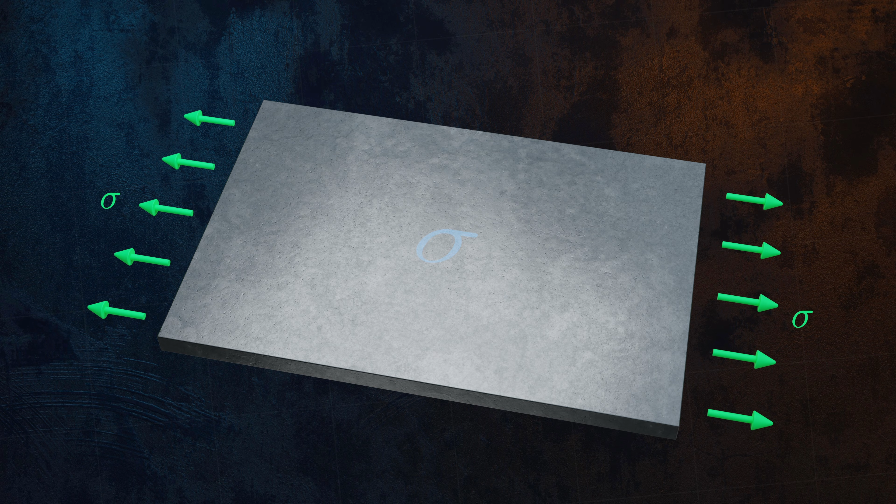If you take a plate and pull on it at both ends, a uniform tensile stress will develop within the material in response to the applied load. This stress is spread evenly across the material. Drill a hole in the plate, and this uniform stress field is suddenly disrupted. Stress flows through a material a bit like a fluid, and the hole forces that flow to detour around it.

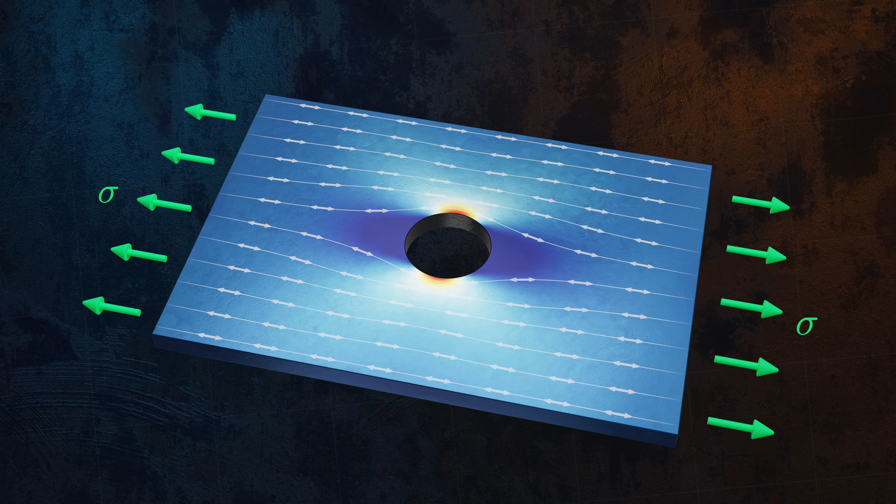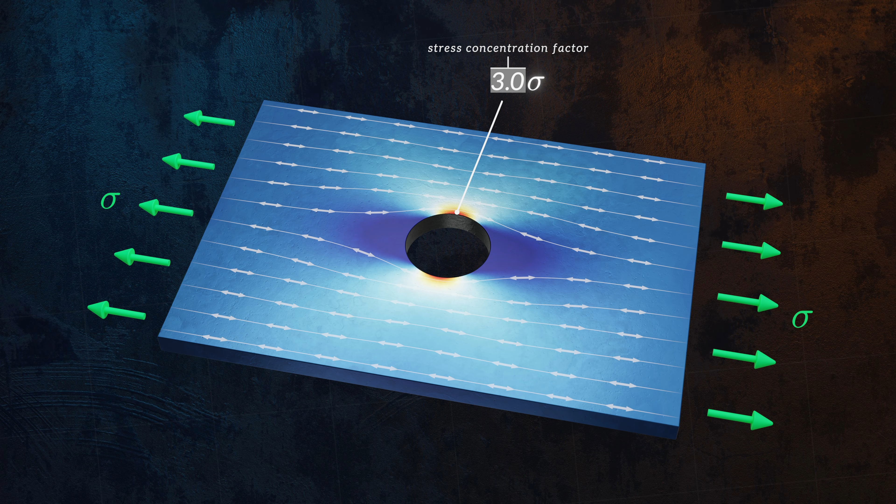The flow lines crowd together at the edge of the hole, which increases the force per unit area in that region. The maximum stress in the plate at the edge of the hole reaches 3 times the applied stress. The hole creates a stress concentration factor of 3. If instead of a circular hole you have an elliptical one, the stress concentration increases even more. The more elongated the ellipse, the more tightly those flow lines are forced together, and the higher the local stress.

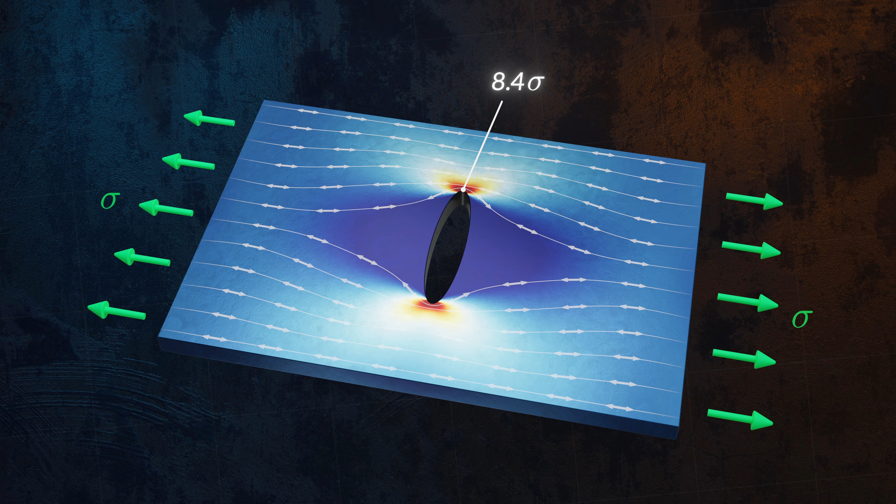This elliptical hole is essentially a crack, a sharp discontinuity where 2 surfaces have separated, leaving a region of the material unable to transmit any load, and forcing the load path around the crack tips instead. If the crack is sharp enough, the stress at its tip can reach high enough levels to permanently rearrange the bonds between atoms, or to break them altogether, which causes the crack to propagate through the material.

And this is what makes cracks so dangerous. They create a large stress concentration that can cause a material to fail at an applied stress well below its yield or tensile strength, the properties we normally use to design structures.

In theory, the local stress becomes infinite as the radius at the crack tip approaches 0. But in practice, when the peak stress reaches the material's yield strength, the material immediately ahead of the crack tip begins to deform permanently, redistributing the load and creating a region of plasticity called the plastic zone. This makes the stress state at the tip of a crack extremely complex.

But luckily for engineers, if plastic deformation only occurs in a very small zone at the crack tip, the severity of the crack depends on just 2 things, the applied stress and the crack size. These can be combined into a parameter called the stress intensity factor, a single value that describes how severe the stress state is at the crack tip.

For a crack in the middle of a plate, like this one, the crack size a is the distance from the center to the tip. This is half the overall length of the crack, so the total crack length is 2a. The stress intensity factor has quite unusual units, megapascal square root meters. That's because it's not an intuitive physical quantity.

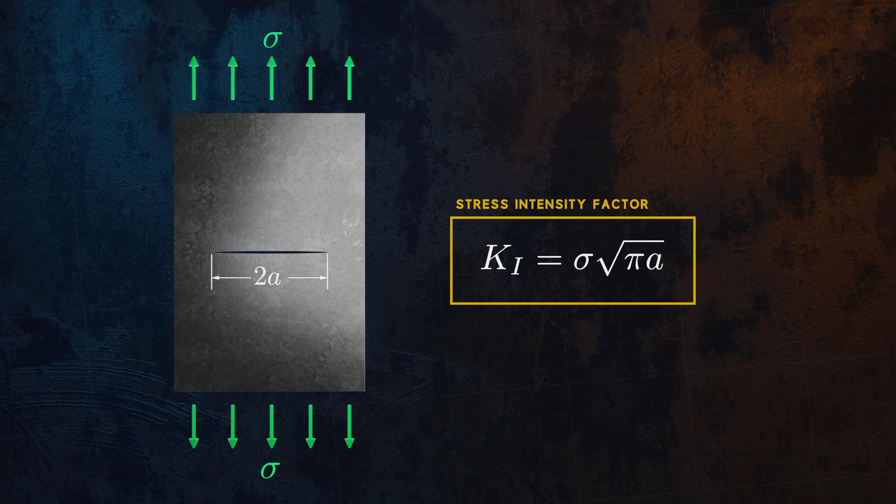It's best to think of it as an engineering parameter that tells us how severe the crack tip conditions are. Larger loads or longer cracks both increase the stress intensity factor, which means more severe conditions at the crack tip, and a crack that's more likely to propagate through the material.

This equation is valid for a through-thickness crack in an infinite plate, far from any edges, but real structures have finite dimensions, and cracks can take many different forms. A crack could have started at a hole, or be located on an edge, for example. These configurations are captured by a geometry factor Y, which scales the stress intensity factor up or down accordingly.

For an edge crack in a large plate, Y is around 1.12. This crack can open more easily, which makes it more severe than an equivalent crack in the interior of the plate. For an edge crack, a is the full length of the crack, not the half length.

The stress intensity factor is called KI because it corresponds to the first of three fracture modes, ways in which a crack can be loaded. This mode, corresponding to opening of the crack, is the one engineers encounter by far the most often in real structures. The sliding and tearing modes use similar equations, but with shear stress instead of normal stress.

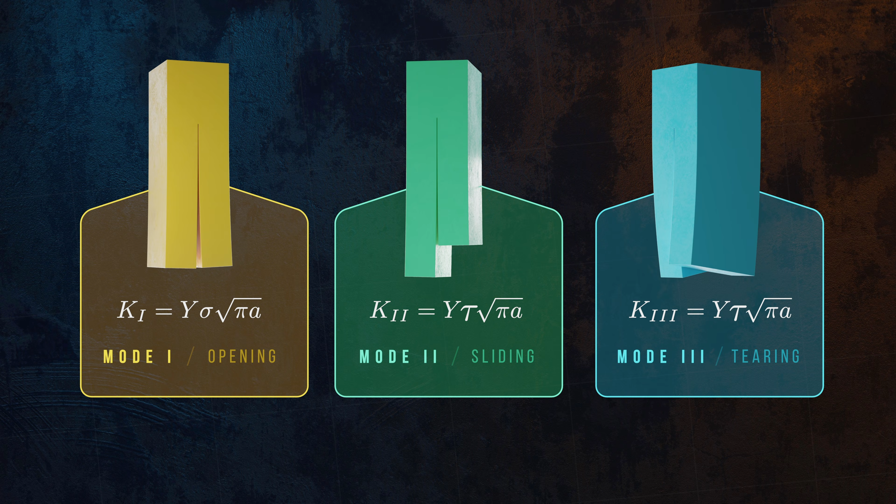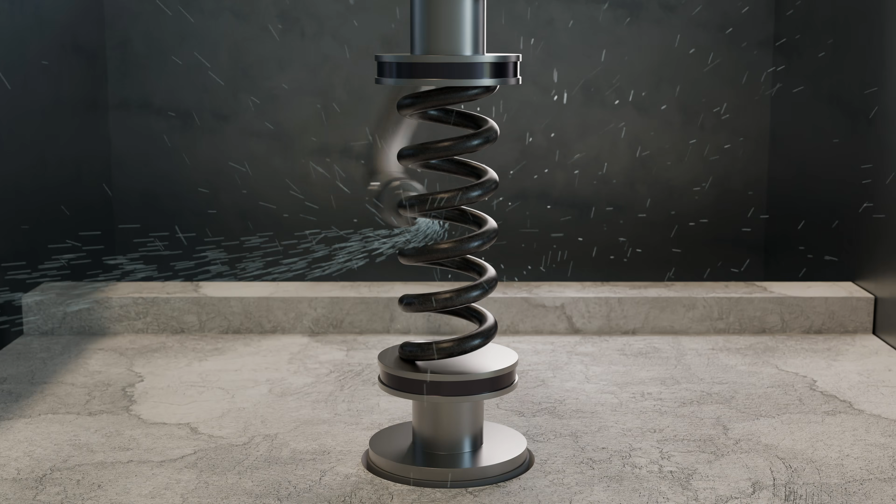Because mode I is driven by crack opening, it's only activated by tensile loads. Compressive loads are actually beneficial when a crack is present, because they act to close the crack faces together, preventing it from propagating. This is why compressive stresses are sometimes deliberately introduced into component surfaces. Shot peening, for example, blasts a component with small particles, plastically deforming a thin surface layer and introducing compressive residual stresses, which make the material more resistant to the propagation of surface cracks.

The stress intensity factor is really useful because it gives us a single calculated value we can use to predict failure in real structures by comparing it against a material property. That material property, called fracture toughness, is the critical value of K at which cracks will begin to propagate within the material. It represents the material's resistance to crack propagation and is obtained experimentally using a standardized test.

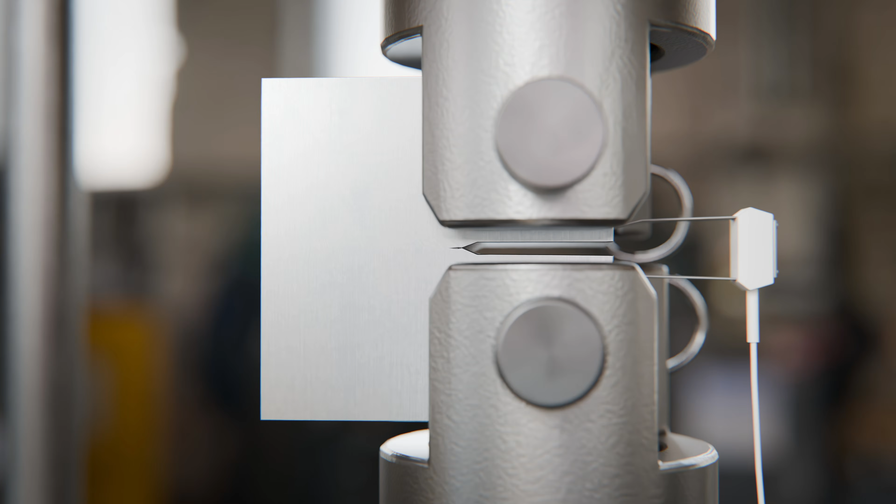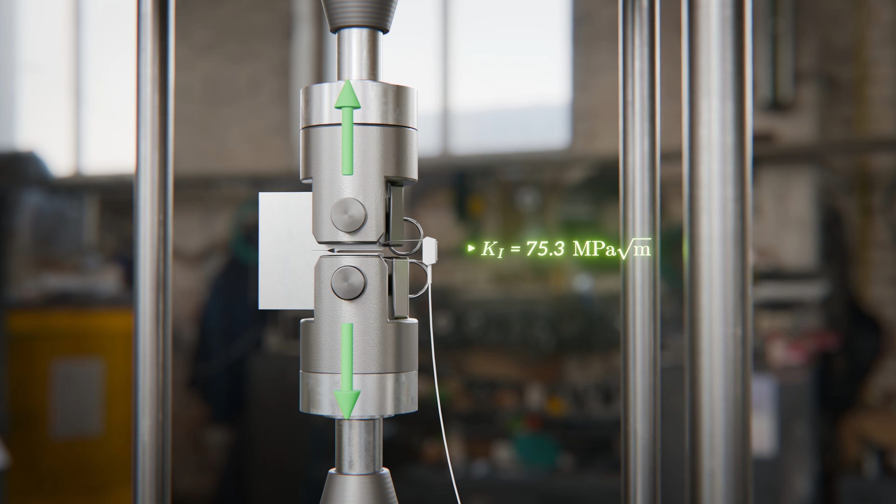The test involves machining a notch in a test specimen and applying cyclic loading to grow a fatigue crack in the notch to a specific length. Once the crack has reached the required size, the specimen is loaded to open the crack, while monitoring the applied force and specimen response. The value of K at which the crack begins to propagate unstably is recorded as the fracture toughness.

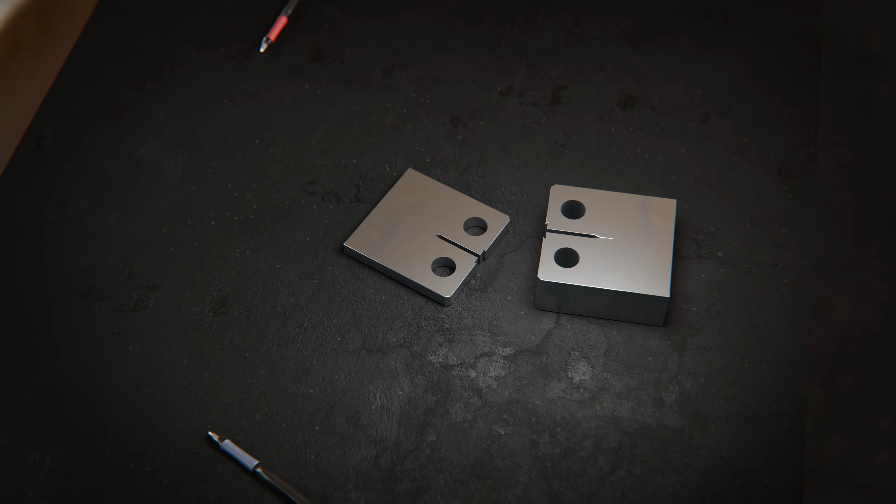The measured fracture toughness depends on the thickness of the material. Thin test pieces don't allow tensile stress to build up through the thickness of the specimen, a condition called plane stress. So they behave quite differently to thicker test pieces, which are in plane strain conditions, where the surrounding material constrains the crack tip and a through-thickness tensile stress develops.

The added constraint suppresses plastic deformation at the crack tip, so the material behaves in a more brittle way and shows a lower fracture toughness. For this reason, the standardized test specifies a minimum specimen thickness, ensuring it measures the lowest, most conservative value, corresponding to plane strain conditions.

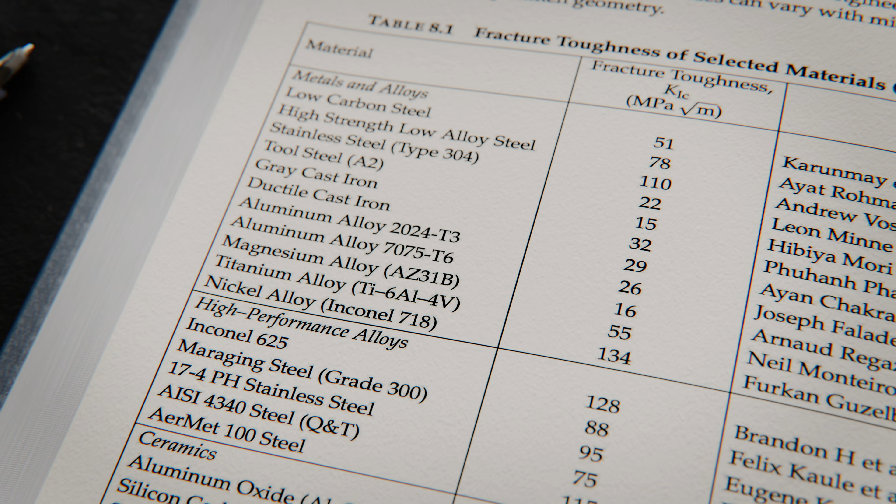Because these tests are highly standardized, the resulting fracture toughness values can be published as reference data and used by engineers designing real structures, although additional testing is often performed for critical applications, or when a material is being used outside of previously validated conditions. Having accurate fracture toughness data is crucial when assessing cracks in real structures.

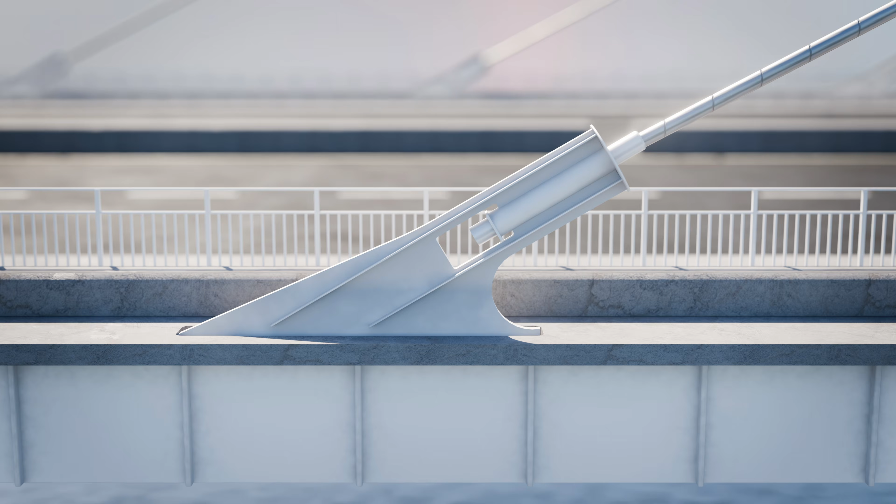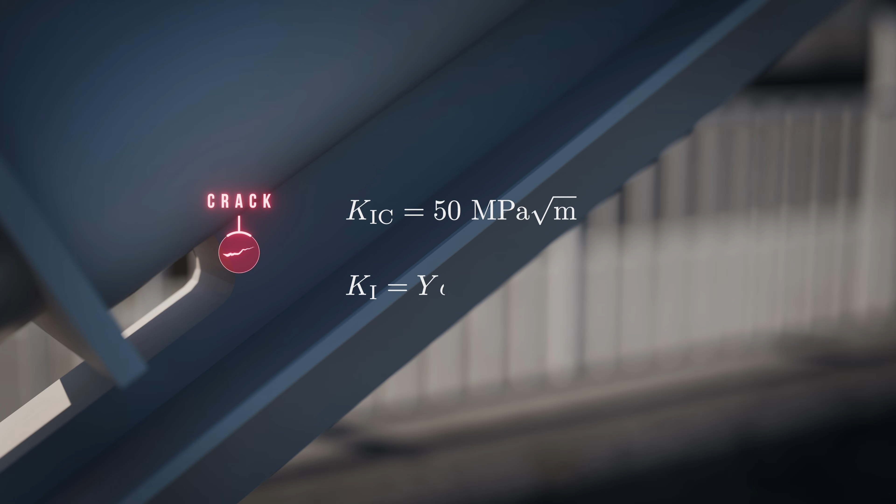Imagine you're the engineer responsible for the structural integrity of a bridge, and during a routine inspection, you discover a crack in one of the stay cable anchorages. You know the fracture toughness of the steel from lab testing performed during material qualification. Using the stress intensity factor equation, you can calculate the critical stress at which the crack would propagate. For a crack length of 10 mm and a geometry factor of 1.12, the critical stress is 252 megapascals.

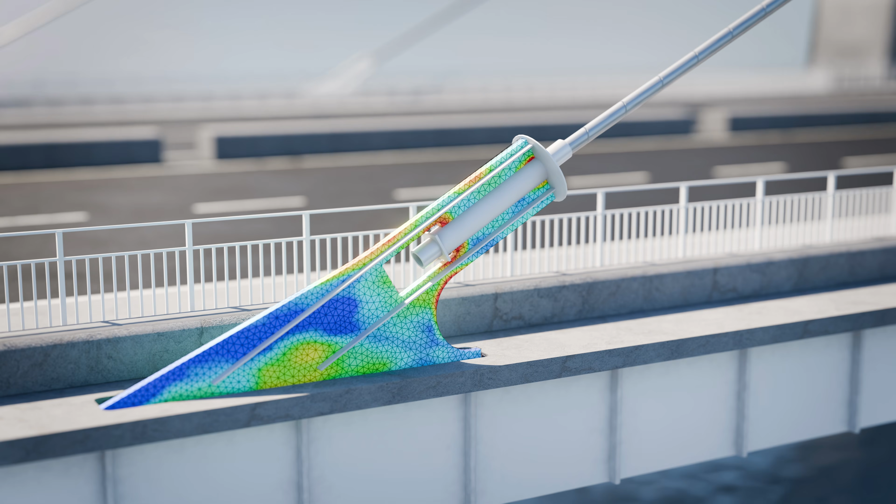Combined with a structural analysis of the bridge, this lets you determine how critical the crack is, how much safety margin remains, and whether the anchorage needs to be monitored, repaired, or replaced. This approach, calculating the stress intensity factor and comparing it with the material fracture toughness, forms the basis of a method called linear elastic fracture mechanics.

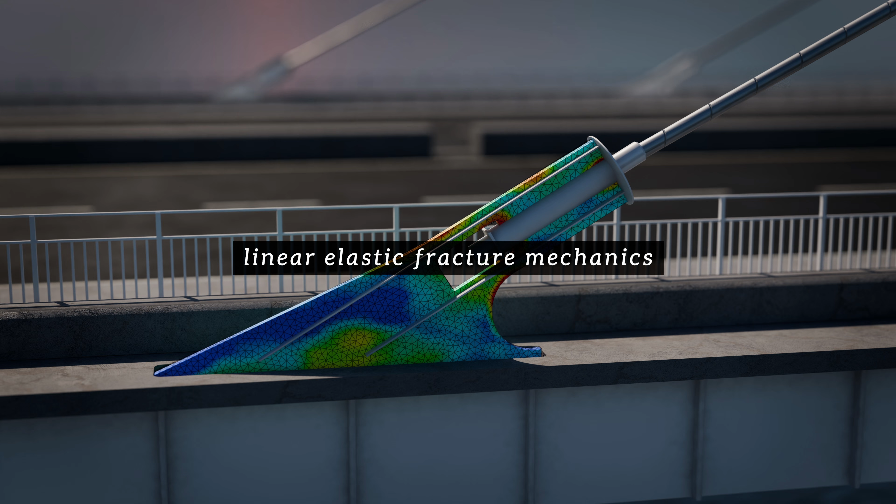We mentioned earlier that the stress intensity factor approach is only valid if the plastic zone at the crack tip is small relative to the size of the crack. This is only really the case for high-strength or inherently brittle materials like titanium and aluminum alloys, high-strength steels, or glass. More ductile or lower-strength materials like lower-strength steels or some plastics deform plastically more easily, resulting in a larger plastic zone at the crack tip, which causes the assumptions of linear elastic fracture mechanics to break down. In these cases, a more complex elastic-plastic fracture mechanics approach is used.

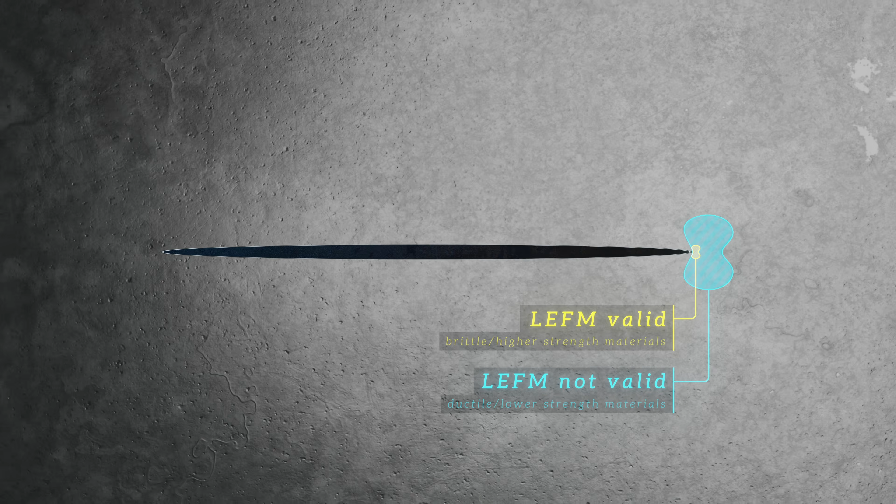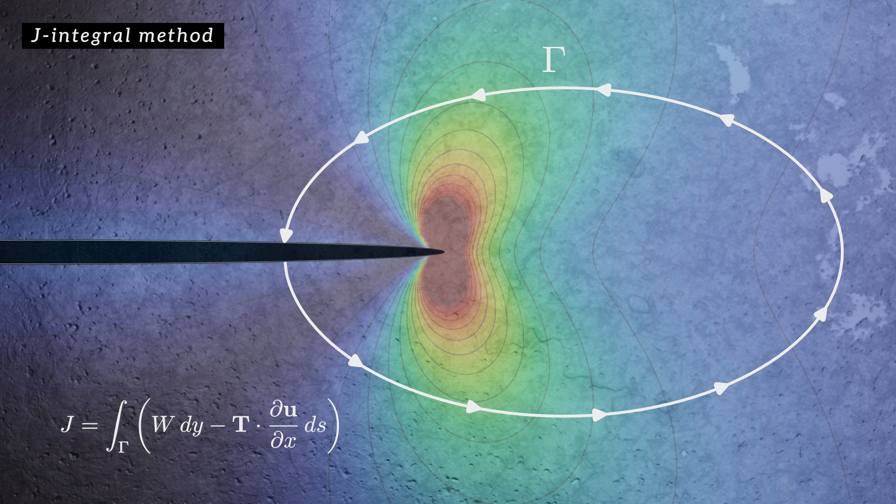One such approach, the J-integral method, involves calculating an integral along a contour path encircling the crack tip to determine how much energy is available to drive growth of the crack. Another approach, the crack tip opening displacement method, involves measuring how far apart the two faces of the crack move at the crack tip when a load is applied.

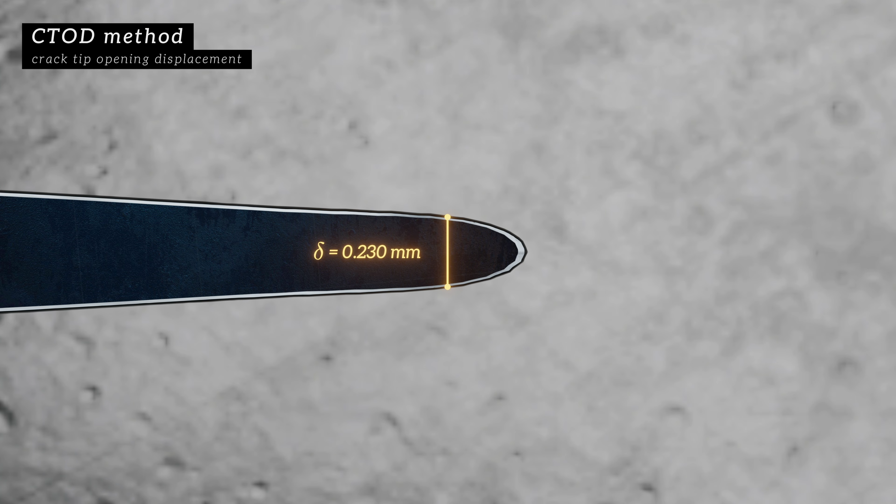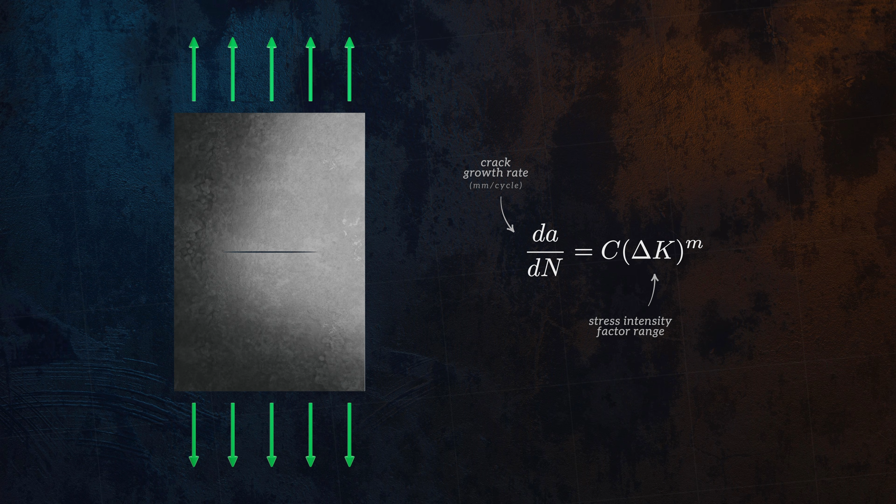We've seen that linear elastic fracture mechanics compares the stress intensity factor with fracture toughness to tell us whether a crack is stable for a given applied load. But if the applied load varies over time, even a small, stable crack can grow incrementally, eventually reaching a critical size where it becomes unstable and suddenly propagates to failure. Paris's law is the key equation used to predict the fatigue growth of cracks. It tells us that the crack growth rate, the amount the crack advances per cycle, is governed by the range in stress intensity factor experienced during each cycle. C and m are material parameters determined experimentally.

Consider a crack with a measured half-length a of 10 mm. When loaded with a cyclic stress that fluctuates between 20 and 200 megapascals, it sees a stress intensity factor range of around 32 megapascal root meters. Assuming material parameters that are typical for a high-strength steel, the crack will grow by around 0.2 mm every 1,000 cycles.

The growth rate accelerates as the crack lengthens, though. When it reaches 15 mm, for example, the crack will have a larger stress intensity factor range, and so an increased growth rate. To calculate the total fatigue life, Paris's law needs to be integrated over the full range of crack sizes, all the way up to the critical size.

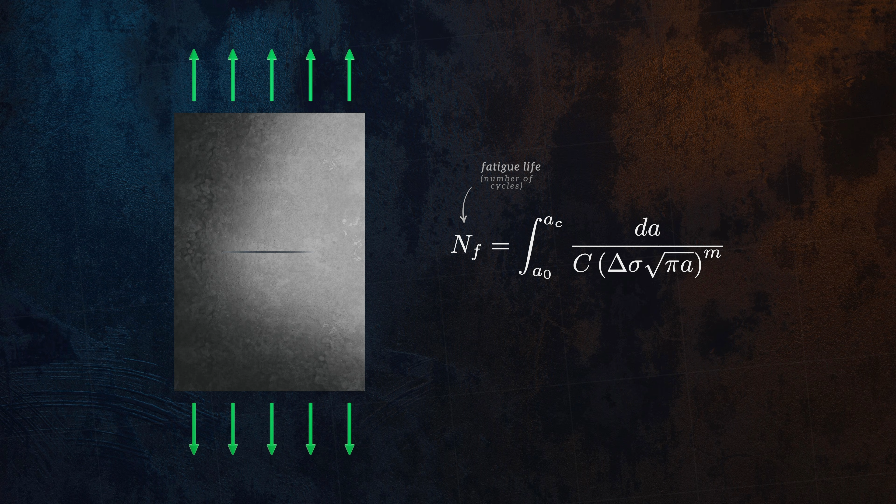On a log-log graph of growth rate against stress intensity factor range, Paris's law appears as a straight line. Because delta K is raised to the power m, small increases in delta K produce disproportionately large increases in crack growth rate. For m equal to 3, doubling delta K increases the crack growth rate by a factor of 8. For very low delta K values, outside the range of applicability of Paris's law, no meaningful crack growth occurs, regardless of the number of cycles. And for very high delta K ranges, as the peak stress intensity factor approaches the material's fracture toughness, crack growth accelerates massively, beyond what Paris's law predicts, and fracture becomes imminent.

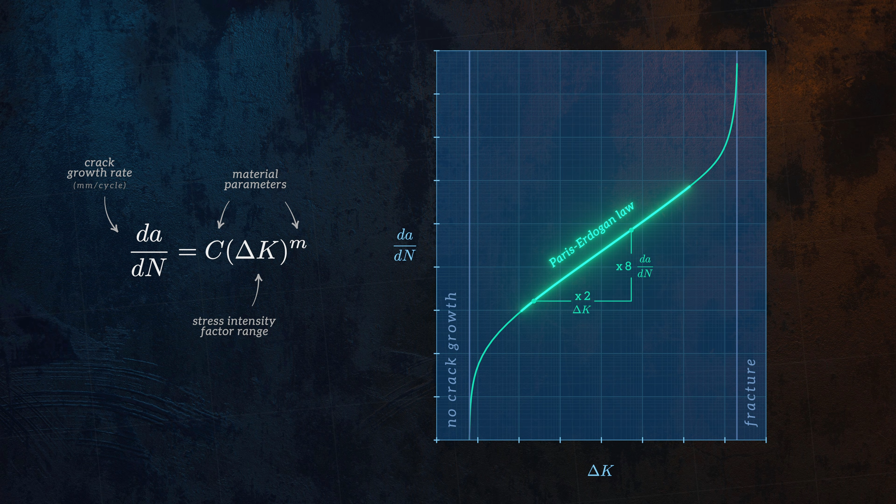No real engineering structure is perfect. Welds contain imperfections. Machining leaves surface damage. And cyclic loading initiates fatigue cracks at microscopic defects that no manufacturing process can fully eliminate. In practice, the presence of cracks is inevitable. Fracture mechanics is so powerful because it gives us the tools to assess how dangerous these cracks actually are. And in doing so, it unlocks a whole new philosophy for assessing structural integrity, the damage tolerance approach. Instead of assuming a perfect, defect-free structure, the damage tolerance approach accepts that cracks will exist and focuses on making sure they can be detected, monitored, and if necessary, repaired before they reach a critical size.

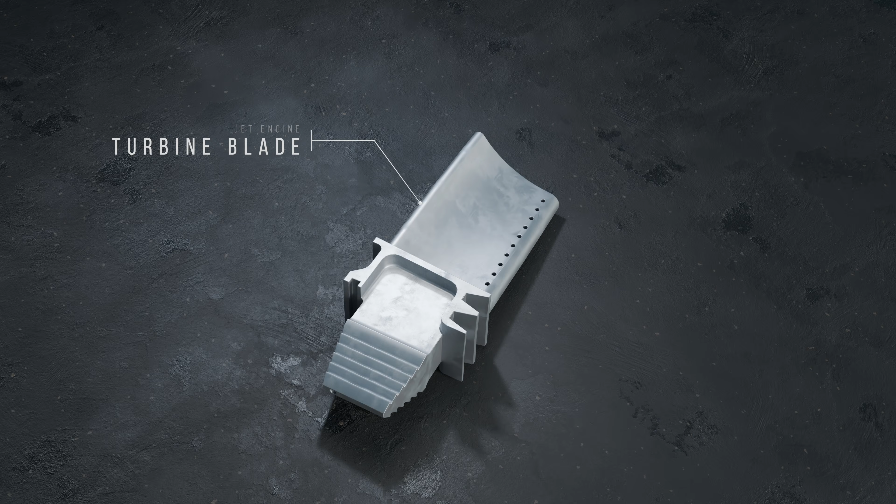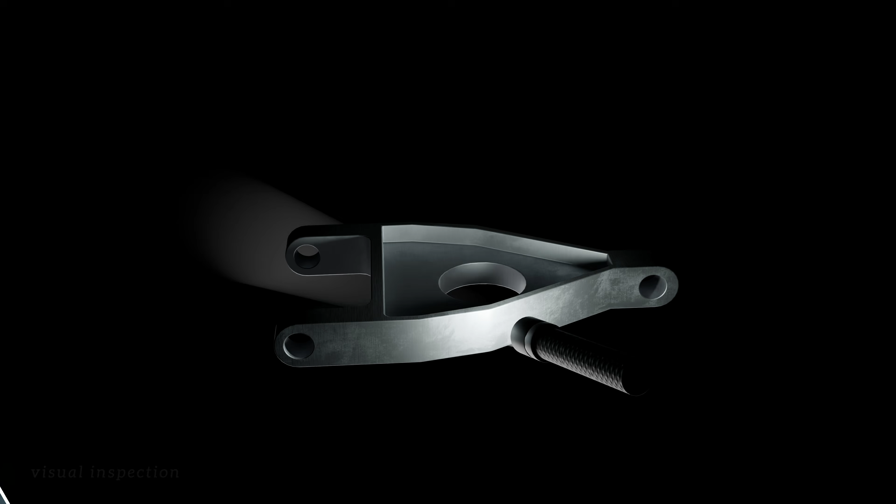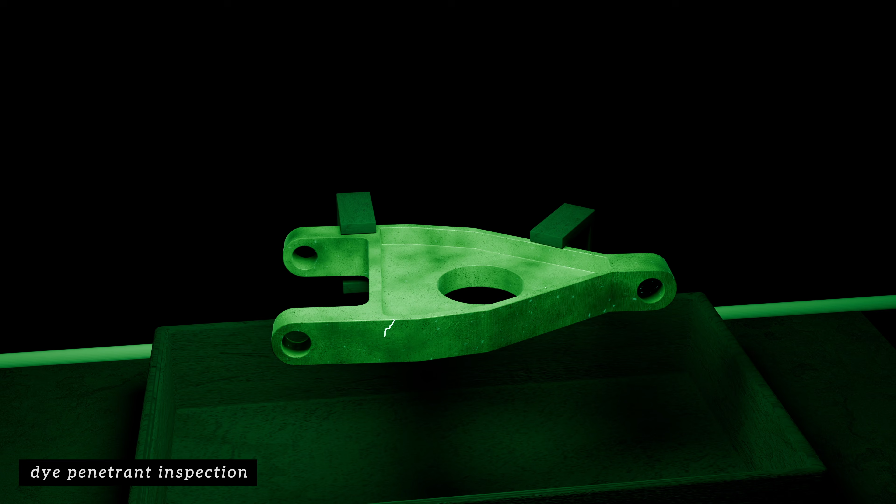This approach is widely used in aerospace, where it emerged in the 1970s. Aircraft components like jet engine turbine blades or landing gear parts are inspected at regular intervals to identify and size cracks. This is done using non-destructive testing techniques like visual inspection, ultrasonic testing, or radiographic imaging. There are even methods that use special dyes or magnetic particles that are drawn into surface-breaking cracks, making them visible. Fracture mechanics is then used to predict how quickly any detected crack will grow, and whether it will reach a critical size before the next inspection.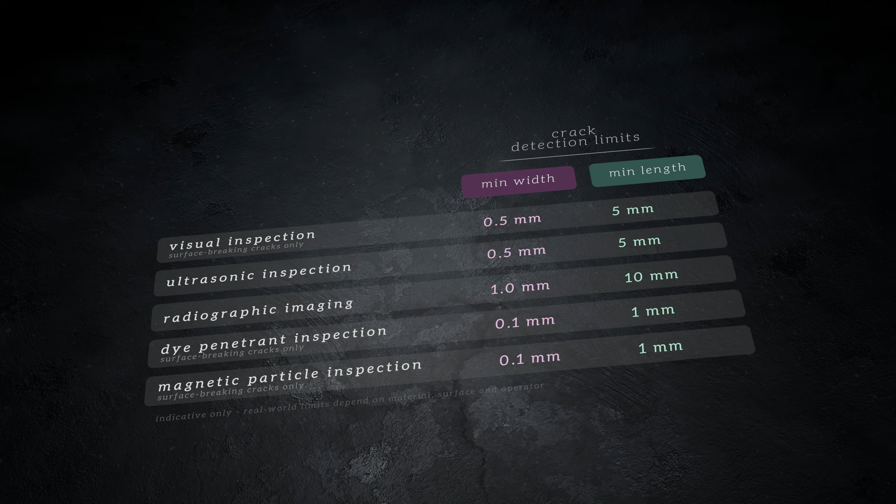But no inspection technique is perfect. Each method has a minimum crack size it can reliably detect. So even if no crack is found, engineers have to assume that any component that passed inspection could contain a crack just below that detectable limit, and use fracture mechanics to check this hypothetical crack will remain safe until the next inspection. It's exactly this type of analysis that's used to determine how frequently aerospace components need to be inspected in the first place.

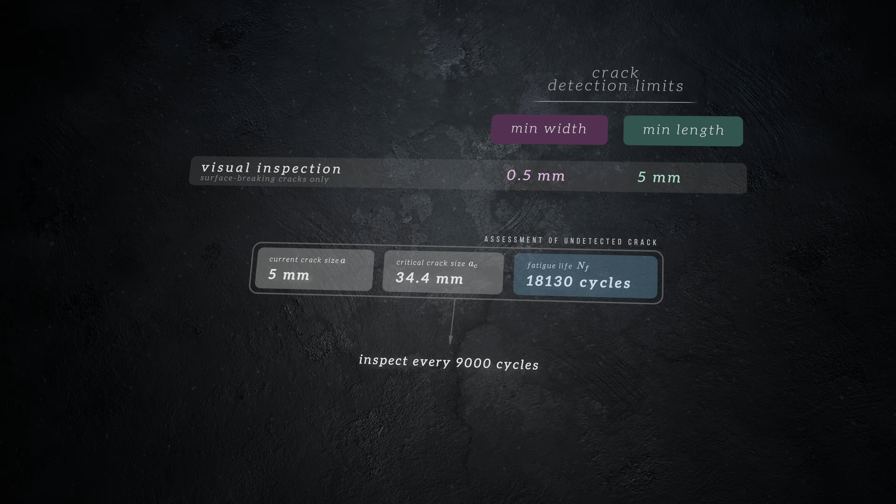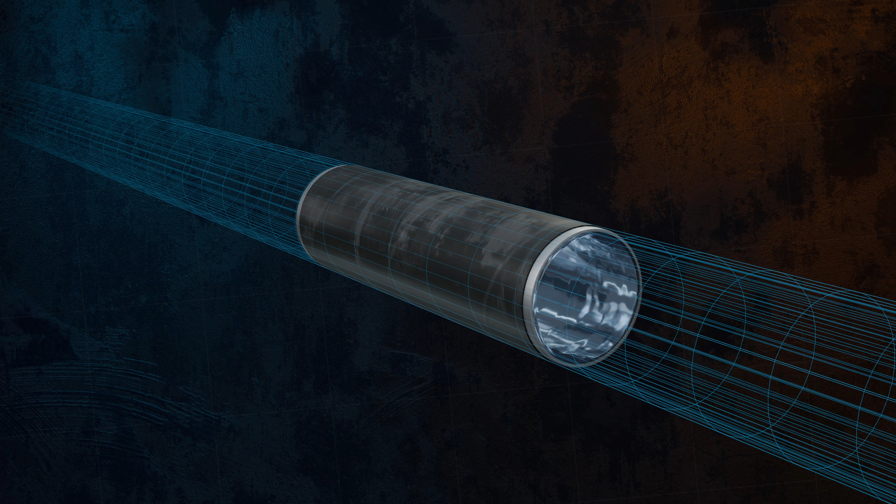The pipeline industry uses a similar approach. At commissioning, pipelines are subjected to a hydrotest, a proof test where the line is filled with water and pressurized to a level 25 to 50% above its maximum operating pressure. This test helps engineers estimate the largest crack that could exist in the pipeline from manufacturing, because any cracks larger than the critical size at the hydrotest pressure, calculated using fracture mechanics, would have failed the test.

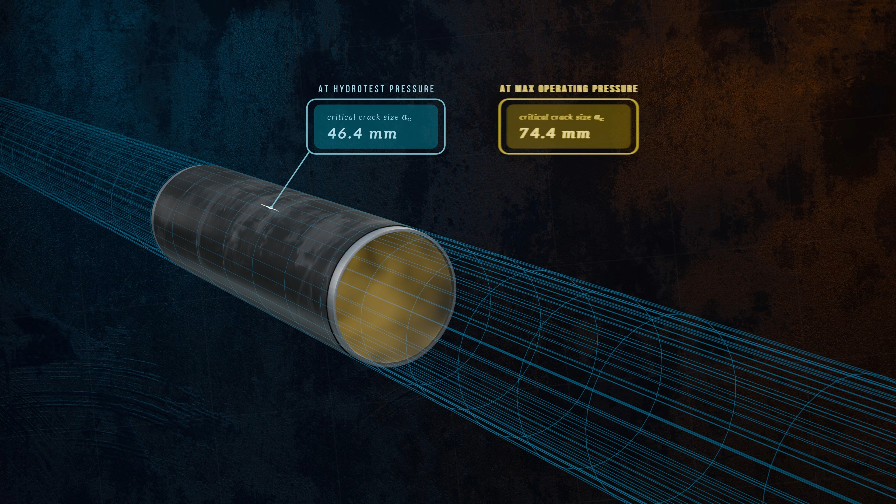Engineers can then determine the critical crack size at the maximum operating pressure, and apply Paris's law to estimate how long it would take this worst-case crack to grow to that critical size under normal operating loads. This analysis can then be used to schedule inspection campaigns.

Once in service, pipelines are monitored using inline inspection, tools called pigs that travel through the pipeline and detect and size cracks. The results feed directly into fracture mechanics assessments, allowing operators to determine whether identified cracks are safe, how quickly they're growing, and when they need to be repaired.

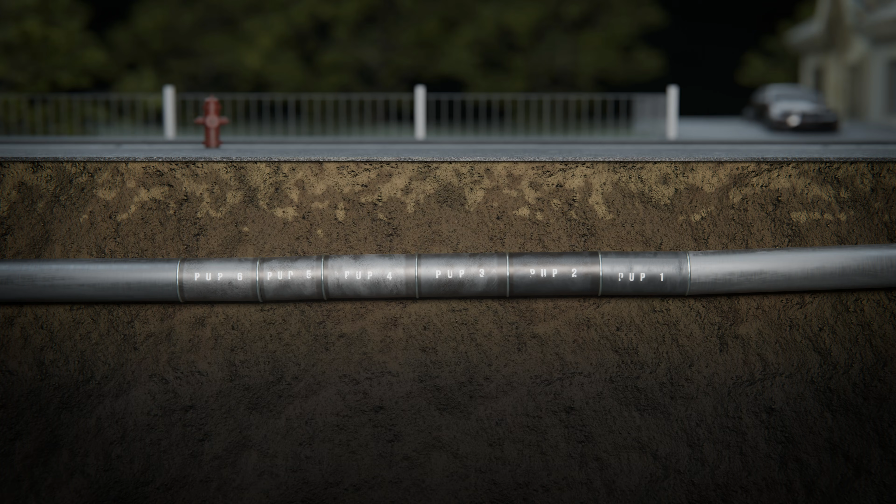So, with all of these tools available, fracture mechanics assessments, hydrotesting, and inline inspection, what went wrong at San Bruno? Why did line 132 fail? The pipe that exploded was part of a short length installed in 1956, when a section of the original line installed 8 years earlier was rerouted. The failure originated at a longitudinal seam weld in one of 6 short pipe sections, known in the industry as pups, that were installed as part of the 1956 rerouting work.

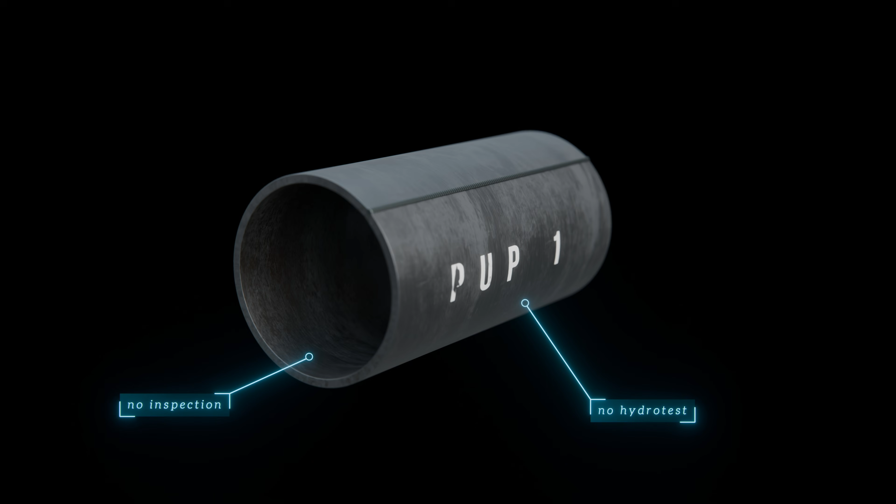Unlike the standard pipe used in the rest of the line, these pups were formed using a non-standard welding process that introduced significant defects on the internal surface of the seam weld, which acted like sharp cracks. These defects were so severe that the pipeline would likely have fractured immediately had this section of the line been hydrotested. But the hydrotest was never performed, and the line was never inspected either. It was built before the first inline inspection tools had even been developed, so it was never designed to be piggable. The route had tight bends and fittings that wouldn't let a pig through.

All of this meant the seam weld defects were left to grow under the ground in San Bruno, getting longer with each pressure cycle until one eventually reached a critical length and fractured when the internal pressure increased momentarily during maintenance work at the upstream Milpitas terminal.

The operators' poor record keeping was a big part of the problem. Their records wrongly documented the pipe as having been manufactured using a process that doesn't introduce a seam weld. And they had no information at all about the steel grade, so the fracture toughness of the steel was a big unknown. These inadequate records made any kind of accurate fracture mechanics assessment completely impossible.

It's often said that regulations are written in blood, and San Bruno is certainly proof of that. The incident highlighted a surprising regulatory failure that meant pipelines built before modern safety standards existed were simply exempt from them, the so-called grandfather clause. This prompted a huge overhaul of pipeline safety legislation in the United States and transformed how operators are required to manage aging infrastructure.

Fracture mechanics gives engineers a powerful tool to predict crack growth, assess structural integrity, and make informed decisions about safety. And with a proper hydrotest, an inspectable line, and accurate records, it's a tool that could have prevented the San Bruno disaster. It's a theme that comes up again and again in engineering. How a part's made matters just as much as how it's designed. The materials, the process, and the quality control are critically important, whether it's a gas pipeline or a simple bracket.